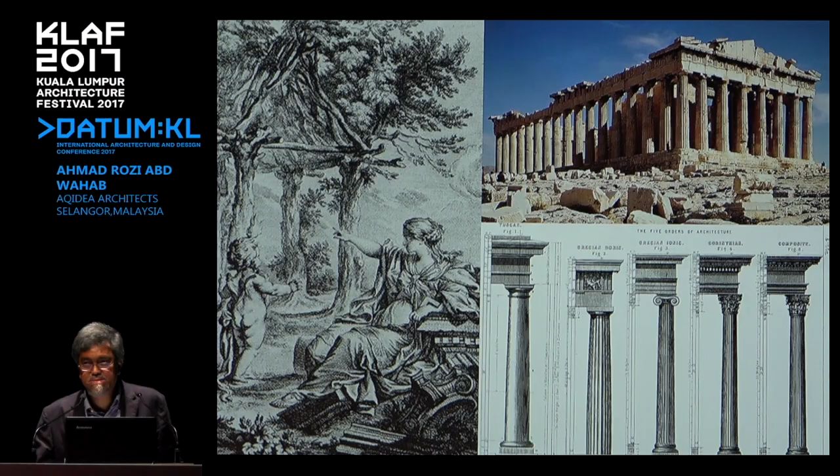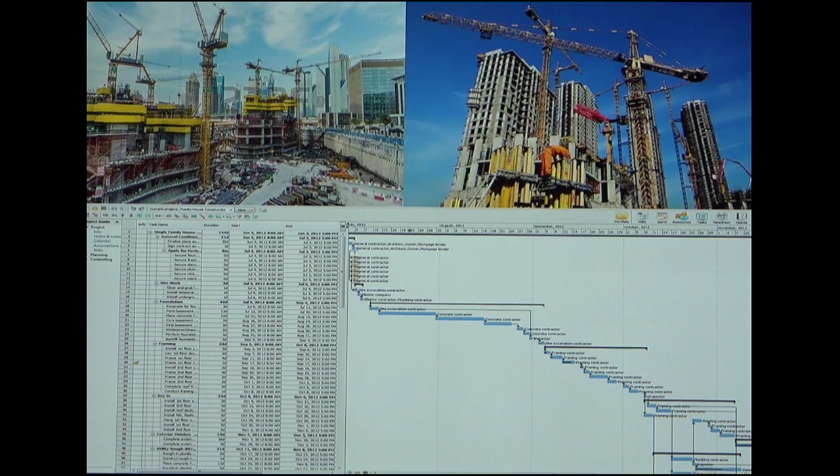And this is the trick that we architects use to create this predictable emotional connection. Architects have been using these symbols for hundreds of years, and certainly the past 30 years, forms and symbols that we are familiar with, and we feel safe to use them. And this is very useful, because building things is terrifying. They are very expensive, they take a long time to build, and it is very complicated. And the people who build these buildings, the developers, the governments, are naturally afraid of innovation. They'd rather use those symbolic forms that we mentioned earlier, that they are very familiar with.

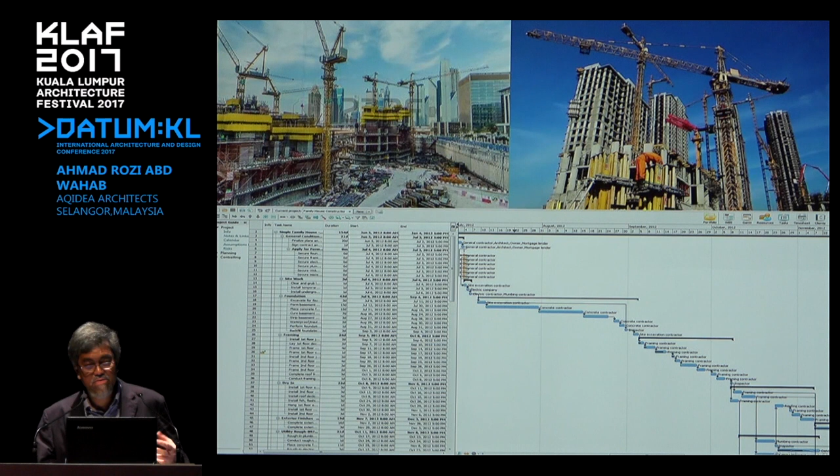Marc Kushner, in his talk, went on to compare two libraries that were built in the same year on opposite sides of the United States, one in New Jersey and one in Seattle. Both are libraries. And how did these two libraries, built in the same year, in the same country, come out completely different? Well, the answer to that is architecture works on the principle of this pendulum.

On the one side, it is innovation. We architects are constantly pushing towards technology, towards new typology, new solutions, a new way of living. Architects push and we push until we completely alienate everyone. And we get depressed, architects feel empty inside, and we have no choice but to go back to re-engage those symbols again that everyone loves and that everyone feels safe with.

And suddenly we feel like we are sellouts again. The pendulum swings back to symbolism, and this went on and on and on. It swings back and forth, and for the last 300 years we have been doing that, and certainly for the last 30 years.

Right, 30 years ago, in the 70s, architects were busy experimenting with brutalism. Lots of concrete, small windows, dehumanizing scale. Well, this is really tough stuff, you know.

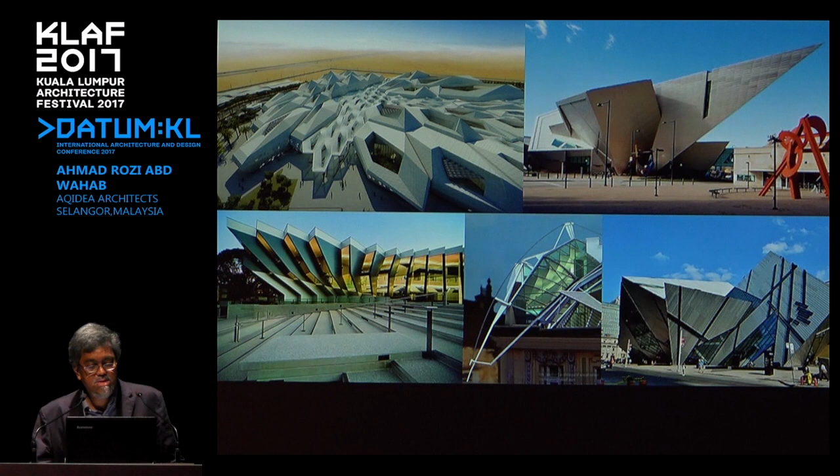But that's not what I intended to talk about today. Today I want to talk about how symbolism and innovation can get closer together in a different form. Before that, let's look at 3 resources on how things are built. We have time, we have cost, and we have creative energy. Architects have no control over time nor cost. However, architects have influence over creativity, and creativity is something that clients desire from the architect.

However, architects don't always have a free hand to create. He is still subjected to external influences, such as the client's desires, end users' expectations, and public aspirations. So the power lies in the ability of the architect to manage these influences by being a good listener and a good educator. Hence, the convergence. The convergence is where the pendulum stays in the middle and blurs the difference between symbolism and innovation.

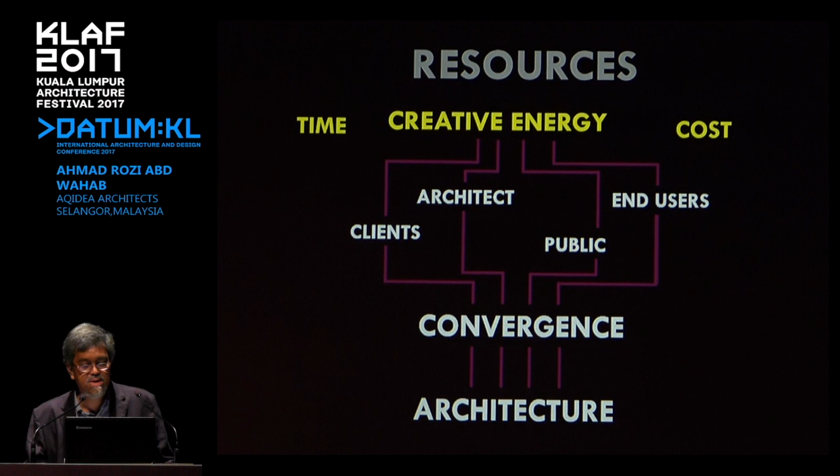Well, our work, since we started 23 years ago, has been moving back and forth with the same pendulum. With certain clients, it was innovation, and with some other clients, it was symbolism. And the pendulum kept on swinging from side to side.

So the first example of my work is heavily swung towards symbolism. This is the Prime Minister's office in Putrajaya. It is the administrative seat of the nation. It portrays a sense of power, a sense of stability, and a sense of balance. Located on high ground, the building facade makes its presence felt with a commanding view of the city.

Although it was built with new technological construction methods, the building still maintains its classical proportions and form, as it was intended to be. Even the layout has courtyards that are common to most European stately buildings. The client at that time aspired to these symbolic gestures to represent order and power. Instead of a European classic dome, this building has an onion dome shape similar to a dome from a mosque in Kedah. They felt the need to relate to the past and to be safe.

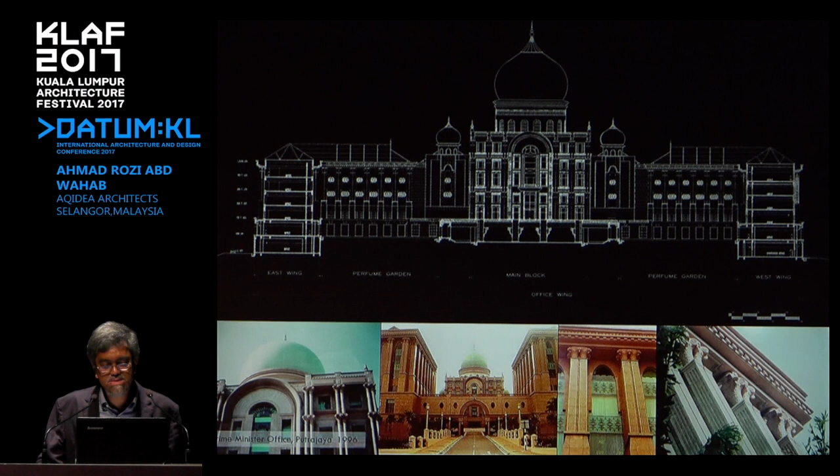The client aspired to celebrate the cultural heritage and historical crafts by adorning the facade with details and symbols that are related to the people. Now, looking back, I feel that the symbolism used really works. It gives the sense of timelessness that relates to Malaysian culture and historical narratives.

The next project, the pendulum swings the other direction. That is to innovate. I was commissioned to design the auditorium, a section of a larger development for the Putrajaya City Hall complex. It was my intention to celebrate its function innovatively and drive away all historical and cultural objects.

The auditorium is a unique building in the shape of a zeppelin. It's like a flying ship, a bahtera in Malay, that floats 7 meters above the entrance hall, supported by 10 A-shaped columns, which gives a dramatic effect as one enters the hall. We were very innovative in this project, but at the same time, there were some symbolic gestures in it as well, in the form of experience.

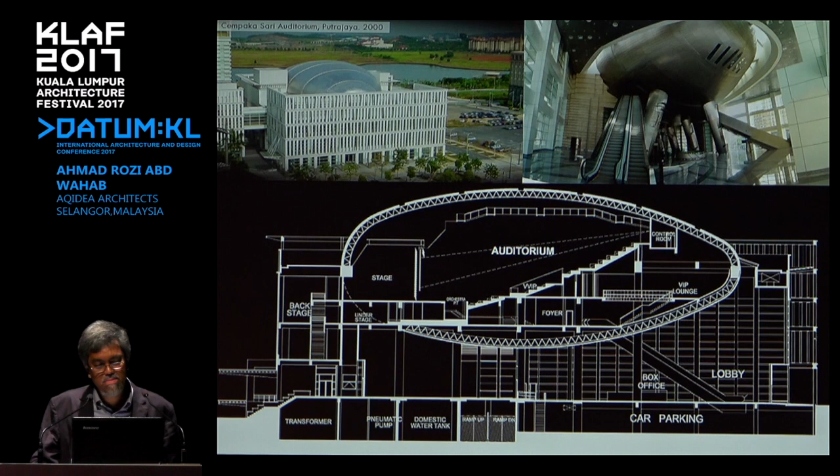So the journey actually carries you to another realm, the theatrical realm. However, as an element of surprise, the floating zeppelin is enclosed within a screen and glass wall, and once you are inside, the auditorium structure is visible.

About the same time as the auditorium, we were also commissioned to design the Palace of Justice. It is located right opposite the auditorium. The facade is decorated with classical Islamic and Malay architectural motifs. Ironically, the design is very much symbolic in nature as compared to the auditorium, expressing old grandeur and nobility, timeless in quality. The results illustrate power through sheer size and classical order.

Symmetry facade reflects balance, judgment, and is highly symbolic to the function that's happening inside. As one enters the main hall, one could not avoid the sense of respect that the space demands. A very high emotional connection to symbols, and very highly charged. It's very highly charged here.

The Palace of Justice is just rich in details. The grey stone-colored facades being symbolic color of seriousness, dignity, of old and wise. Here, I use innovative new technology to achieve highly charged symbols.

Then in 2008, the pendulum swung the other way towards innovation, where we applied rectangular box with straight lines and efficient floor spaces. This is the new income tax office in Sungai Petani in Kedah. No more decorative columns, no more decorative details, and devoid of any classical proportions. Simple solutions for simple requirement of a governmental agency office.

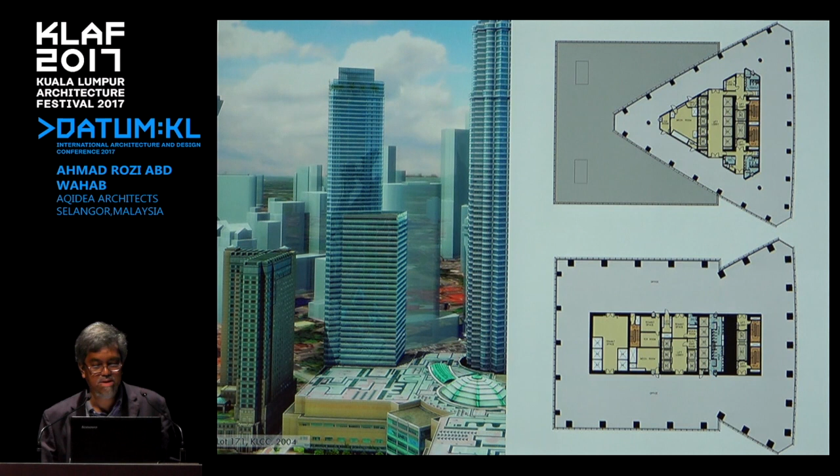Both Pelli and our office drove the design towards technological and constructional innovation. It is devoid of any embellishment or decoration and has successfully played a role as a backdrop to the Petronas Twin Towers, which is the national icon. The floor plates were from two basic geometries of a rectangle and a triangle interlocking each other. And at a certain level, only the triangle floor plates rise up to the 60th floor.

The facades were more subtle and subdued so as not to outdo the Twin Towers. Although stripped of any embellishment or any historic reference, it still has its own elegance and finesse. Although the facades are in contrast to the more ornate Twin Towers, the materials and details chosen do not alienate each other. They stand side by side elegantly. In this scheme, the pendulum swings towards innovation.

In 2003, I was invited to participate in a design competition for an oil company headquarters building in Sudan. We won the first prize. The design calls for an iconic office building. Here, innovation and symbolism actually merged. In the design, I managed to push innovation with new technology, new materials, new ideas, but with a form that has emotional symbolic gestures of the past, mud towers that are found in Sudan. I think here the pendulum really stays in the middle, hopefully for good.

In this next project, I continue keeping the pendulum in equilibrium. It's neither going towards innovation or symbolism. This is a project in 2003 where we collaborated with Mr. Bob Kessler, who has a practice based in Hong Kong, to design a luxury apartment not very far from KLCC. Due to its tiny site, only 2 units per floor were designed on a butterfly-shaped floor plate.

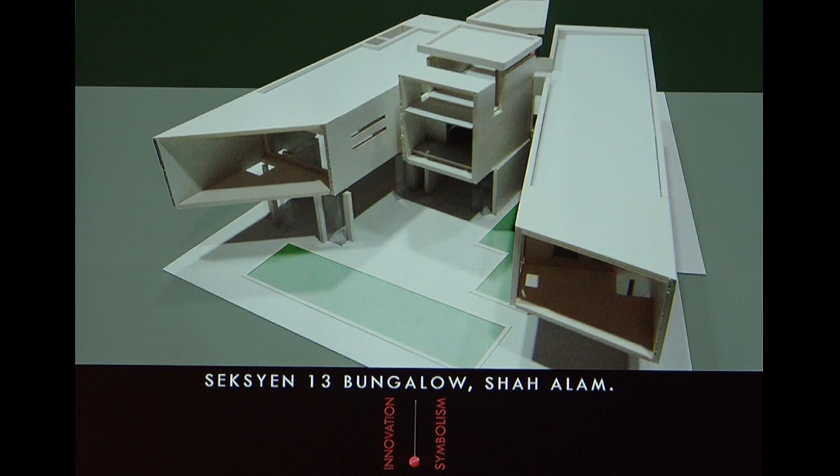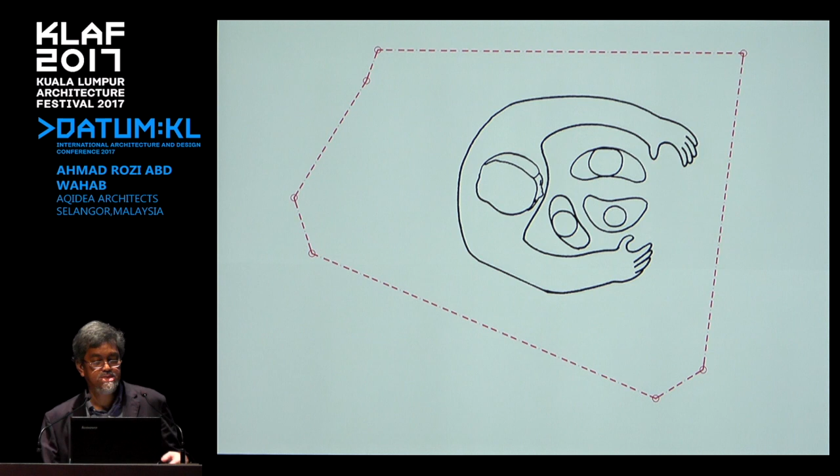Carrying through the idea of merging, we embarked on a smaller project, which is a bungalow. The forms were basic, whitewashed, simple blocks clashing into one another, taking ideas from the old traditional Malay house, sitting on wooden stilts. This new simple form sits on round pilotis, giving the impression of a floating box. The concept is based on the idea of a family being protected by the head of the family.

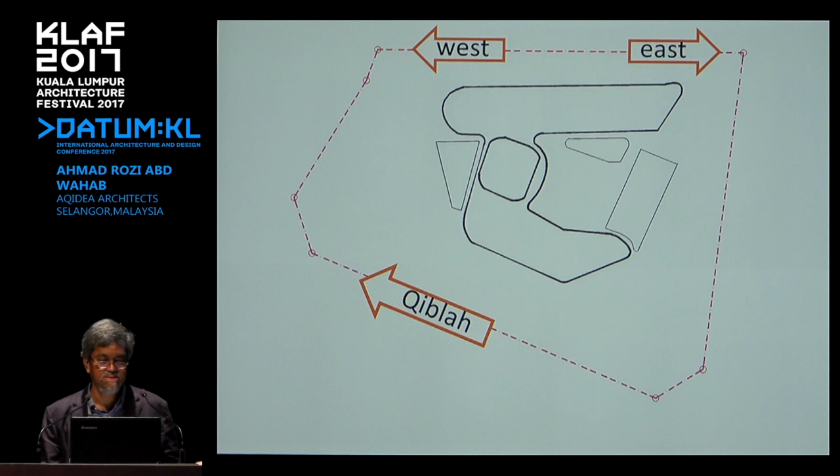He threw out both his arms, one arm in line with the Qiblah, Makkah, and the other arm in line with the cardinal axis, the east and west. With the arms extended out, he faces east, embracing the morning sun and celebrating the coming of a new day, forming a small courtyard for the family to enjoy with full privacy from the neighbors and the street.

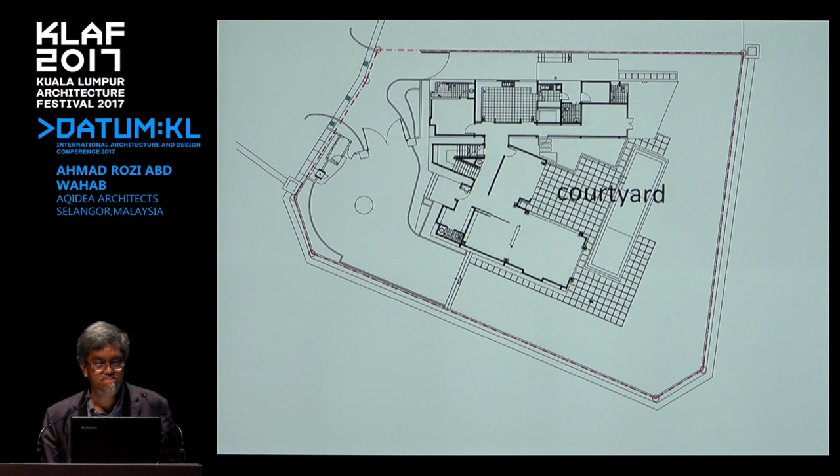Meaningful and fully functional internal spaces were carefully connected to ensure workable family experiences could happen. The house was completed in 2011, and this is also a very good example where both symbolism and innovation merged.

When the bungalow was completed, the forms were in such contrast to the neighbors, and the neighbors called it the box house, the spaceship, the house without a roof, etc. There are so many things that they talk about. They invented metaphors. Here we managed to build modern forms, but with subtle cultural and religious narratives that give meaning and emotional attachment to the occupant.

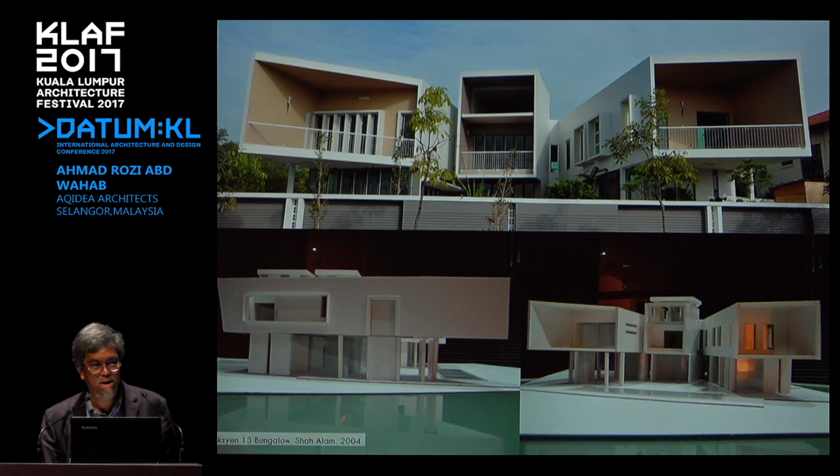Now, this led to my final showcase of my work, which recently won the PAM Award, and eventually led to the invitation to this talk. The Election Commission's headquarters building was our winning design in a competition organized by the developer Putrajaya Holdings back in 2008. The site is relatively small, 0.6 acres. The site plot strongly dictates the shape and form of what the building will eventually be.

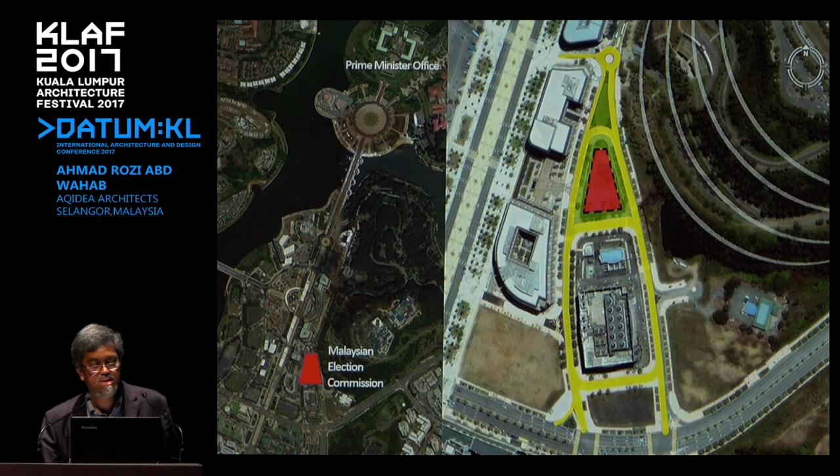The site is a little bit hidden away from the main Putrajaya Boulevard, but exposed towards the east to an open green hill park. As a start, we were looking for something to relate to, and we started by looking at some forms. Conceptually, we were looking at many, many types of ballot boxes that may relate to the function it is meant to serve. Well, here's a short video of how we conceived the idea. Oops, sorry.

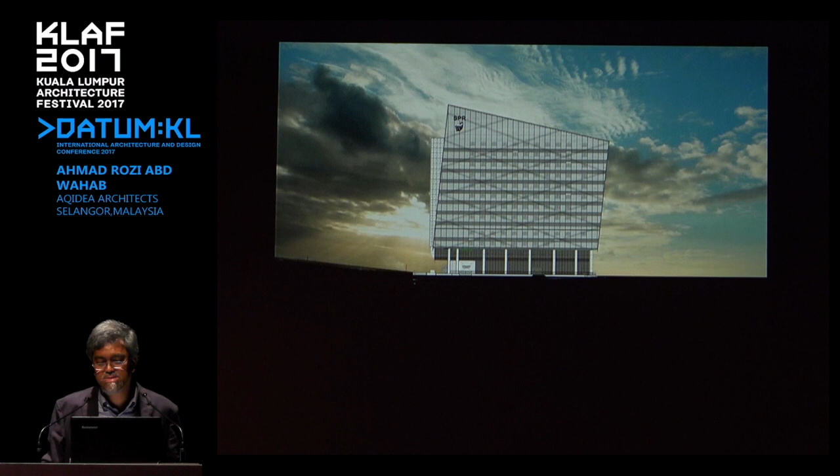This video explains the symbolism that is present in the design and proves innovatively that it is not just a boring white transparent box, but it gives metaphorical meanings to the building owner and people who work in it. It is basically a two-zone building, primarily a private realm, office and meeting rooms on the upper section, stacked on the public realm, such as gallery space and cafe on the ground to the fourth floor.

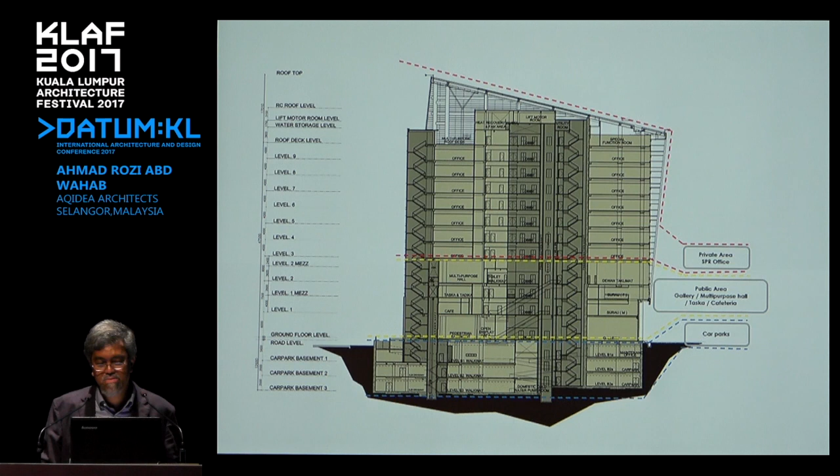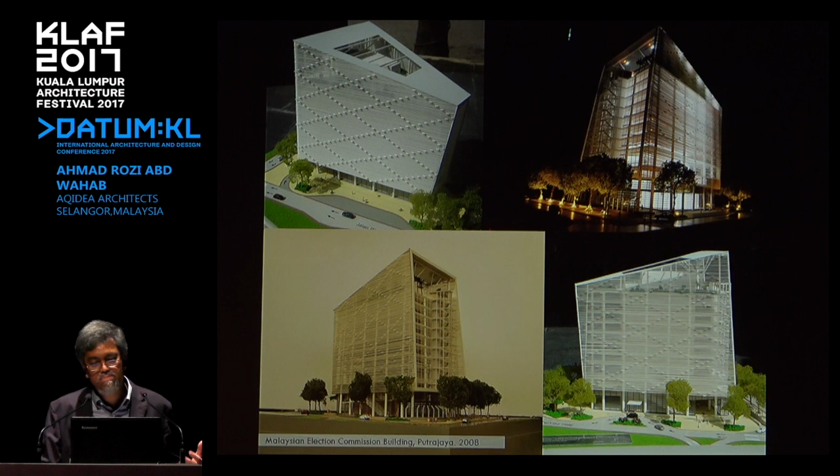Generally simple floor plates with a central core, and we made models. We tested them on the facade, and we also tested the lighting effect on the building. The facade of the building is punctuated with this crisscross pattern. It's a voting pattern, and it's very much apparent during the day and during the night. And the floodlights at night, as you can see, celebrate this.

It works in the day, as I've mentioned, and it works at night, and the light colors change according to events and festivities. The product is a single glass box sitting on pilotis with crisscross voting marks displayed all over the facade. And here's another short video of the completed building.